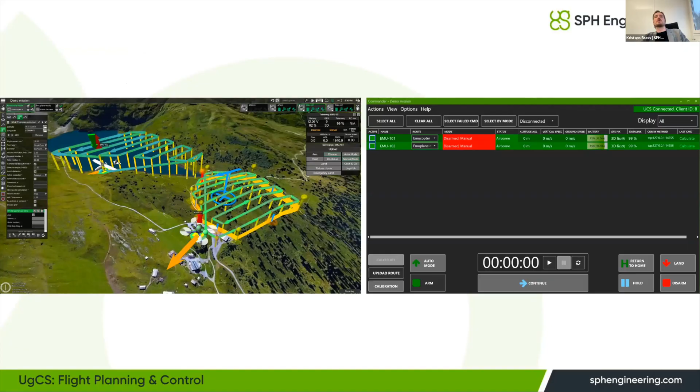Going back just a few slides, what I also wanted to say is that if we take a look at all of the lineup of products that we have, I'd say Commander is basically the most full version of UgCS you can get, because with this you essentially get all of the features of all the other licenses with the addition of flying multiple drones. So if you have some application which requires flying multiple drones at the same time, this would be the solution to use.

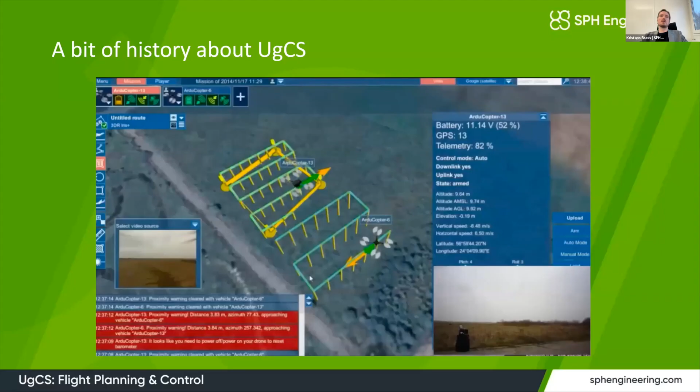I'll look at the Q&A in just a bit, but for now I want to show you the software demo, how UgCS Commander works in reality. This will be in the simplest scenario with only 2 drones, but like I said, it can be extended. So a small disclaimer.

I am currently on a Mac system. Commander works on Windows, so I have Commander running from Parallels on my Mac, and the UgCS running natively on my Mac. Just so you know, I'm running a non-standard deployment for this webinar. The standard deployment would be running UgCS as well as Commander on a Windows native system.

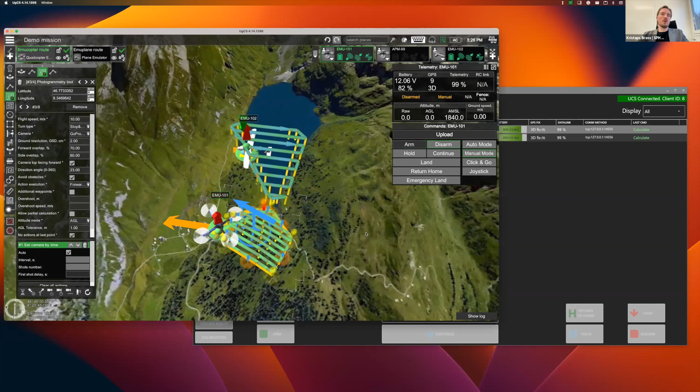So let's go here. I'll share my screen with you. I'll have to share the whole desktop, just so you can see both programs running simultaneously. So here they are. Many of you are probably already familiar with UgCS. I have it running here, and this is just the basic setup where we have two drones.

I have the Emucopter, and then I have the Emuplane as well. So basically one quadcopter, one fixed wing drone. If you have any other drones, you would also have them available in Commander. There is a bit of configuration you need to do to define which drones exactly you want to use in Commander, but it's really easy to do. Currently there's two drones which I would be using here.

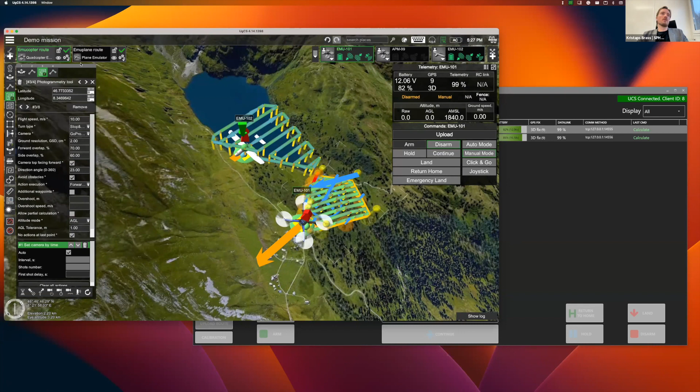Also, I am currently in my demo mission. Commander detects which routes are supported for which drone. So you can currently see that I have two routes, one for each of these drones.

If we now move quickly into the Commander, here, I hope the interface is large enough for you. Like I said, I'm running parallels, so there might be some issues. I hope that everything will work okay, because the Commander is currently running in a virtual machine on the Mac. In case we run into any issues, just so you are aware of what could potentially happen here.

In any case, you can see here I have both of these drones, the EMU 101 and EMU 102. I have routes selected for both. Typically you would go ahead and select them.

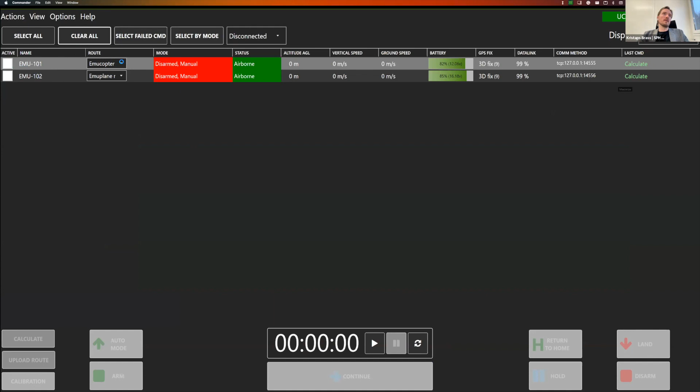Is it possible to connect multiple videos to UgCS Enterprise? Yes, that's entirely possible. UgCS Enterprise supports multiple video streams. In theory, depending on the network bandwidth, it's even possible to have basically up to the number of drones you can fly. In that case, it would be 10 drones simultaneously, so you can have 10 simultaneous video streams.

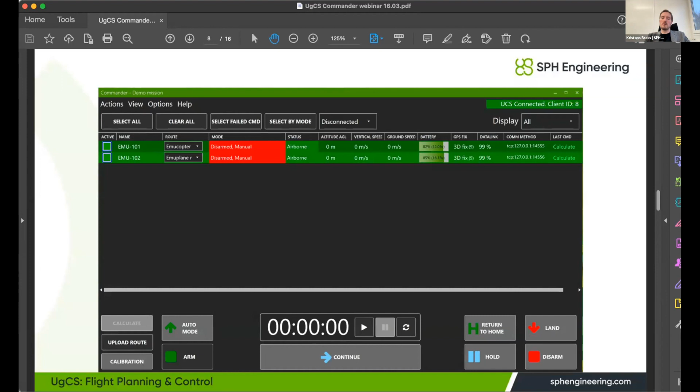One note though is that the video player of UgCS Enterprise, maybe I'll put it here on the screen so you can see it. You can basically divide the window by either seeing 1, 2, or 4 videos simultaneously. If you need to see more than 4 videos at the same time, you would need to open up another instance of the video player, and then you can have additional video streams. So essentially you're not limited in that sense. I'd say the main limitation is actually the network bandwidth.

So now my Windows is starting up. I knew I should have done this on my Windows machine back at home, but hopefully we'll get there and I'll be able to show everything. Okay, while it's starting, I'll see what other questions I can answer here.

From Mark, there's a question of what equipment is needed. In general, I'd say equipment needs are, first, obviously whichever drones you would be using. That's number one. Second, assuming you're using DJI drones, multiple at the same time, I would recommend using a dedicated Wi-Fi router, a good one that can handle the simultaneous connections, and then basically a computer, ideally with multiple screens, although you can actually use also multiple computers.

For example, if you know that in the field you're going to have, let's say, 2 laptops, that's also not a problem. Like I said, the software is modular, so you can have the software running on different computers as long as they are on the same network. You can have a setup like this: UgCS on one device, Commander on the second one, and then the videos that you are getting from the drones on the third device.

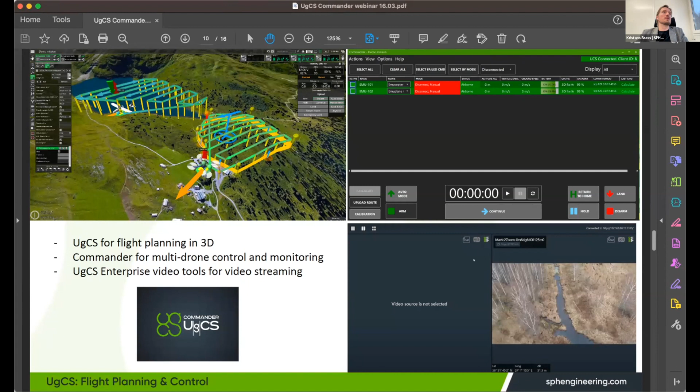So I'll just now switch the presentation back into full screen mode. I will reshare the screen just to make sure everything is running smoothly here, and then I think let's just basically go through the Q&A. If somehow miraculously the virtual machine does decide to launch, then I can show you that. But if not, then I think we can handle it, and that's okay.

Another question I see is, any services related to agriculture or precision farming? Well, agriculture might be one of the applications for Commander as well, especially if you have multiple drones which you intend to use at the same time. With UgCS Commander, you can have, for example, a different drone flying over a different agricultural field.

You can track the drones, track their speed, see the live video coming from them, as well as their altitude, for instance. So for sure, I think agriculture can be one of the potential applications where Commander can significantly speed up the time it takes to do surveys, as long as it's possible for you to run multiple drones at the same time. This is also one of the real areas where this can be deployed. Okay, let me just quickly read the next question that's here.

Okay, this is about different flight plans. Can you upload multiple missions and have Commander give different flight plans to different drones?

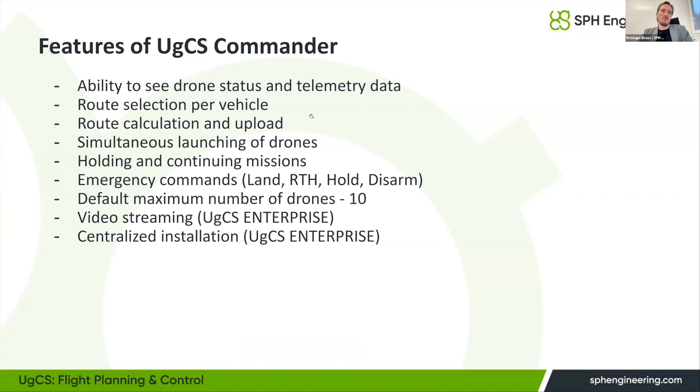You can already actually do a similar thing with our corridor scans. You can plan a longer corridor scan, and split it, and then with the split routes, let's say you're running 3 M300s, you can simply select which route would go for which drone.

I do have an idea how I can try to get the virtual machine working. So let me try this.

So then kind of going on further, what are the questions I can answer here? Well, quite a lot of them actually, really good.

Is data that has been captured protected, and how does it happen? This is a question from Anonymous. Well, basically all the data you gather, it really depends on whether you are streaming the video or not. The first scenario would be when you are not streaming the video with UgCS Enterprise or Commander. In that case, all the data is stored locally on the SD cards of the drones, as you would normally map out an area, so everything would be stored on the SD card of each of the drones which are flying.

No, it seems that Parallels is refusing to start. I think at this point what I can do is share the screen of UgCS, and then I can try to show different things there.

For the next Commander webinar, I promised you guys I will be using a Windows machine for that, without any virtual machines. It seems that maybe when I'm sharing the screen over Zoom, that's what it doesn't really like. But in any case, I'll share my screen of UgCS.

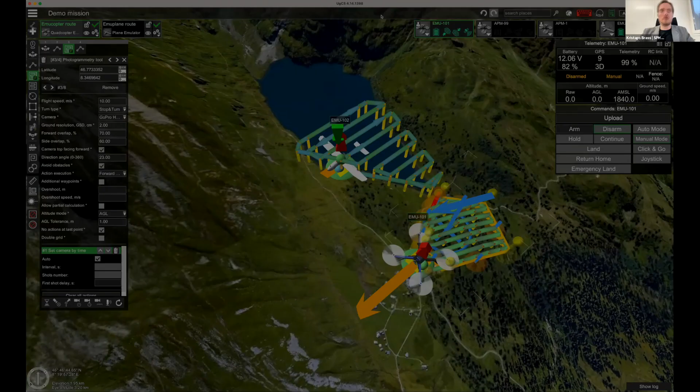So maybe quickly also address the question again about how you plan for multiple drones. I would probably actually do it like this: you can create a new mission, and then let's say we create a single route for the DJI M300.

We can go into corridor mapping, select some camera. Let's maybe use the H20 ground resolution, and specify 2 centimeters. Now we can plan, for example, a corridor scan mission. So maybe something like that.

Okay, so now we have 2 of these survey lines. In any case, we only have 1 corridor scan mission right now. So what you can do is, in the corridor scan, click on any of these points, and then at this point you can select the option to split.

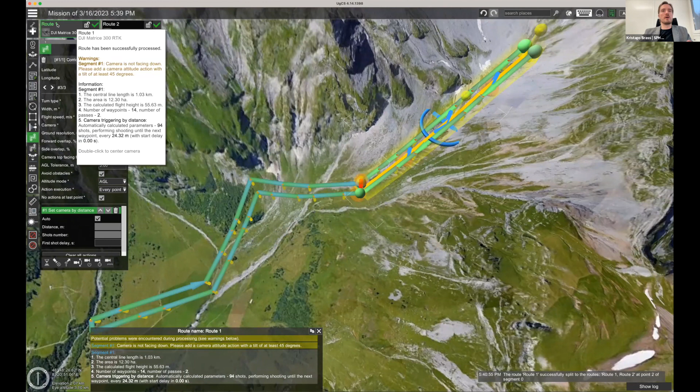So you select it, and now you can see you actually have 2 separate routes, so 2 separate corridor scans. In this case, you can run a different drone on each of them. In Commander, you will be able to choose, let's say, route 1 for the first M300 and route 2 for the second one. So that would be one option of what you can do.

Going back to the questions we had, from Matthias: is it possible to operate the drones in manual mode and see the real-time location of the drone in UgCS? Yes, it's fully possible. Here we can go to the emulator drone, and even with these simple emulator drones, you can fly them in manual mode. UgCS will show the drone no matter what, as long as it's connected there - this includes ArduPilot, PX4, DJI, no matter what drone you have, as long as it can connect directly to UgCS.

You can see here it shows the flight mode, so even when you're flying the drones manually, you will still be able to see them. You can imagine a case where you have 5 or 10 drones flying simultaneously, where you can monitor their location on the map here in UgCS, and see all their telemetry data in UgCS Commander. It doesn't matter whether you're flying them in automated or manual mode, you will be able to see all the drones and their locations. I hope that answers your question.

From Stefan, next question: does Commander provide an exact time for synchronous operation of 2 or more drones in order to reach defined waypoints at a certain time? Good question, but the answer is that it does not synchronize the drones by time - that's something we have in our drone show software. So if you need time synchronization, which is typically used when you want to use drones for entertainment purposes, I'd suggest looking into our drone show software.

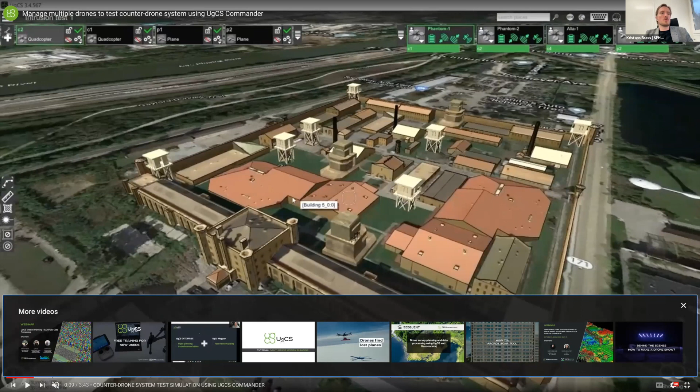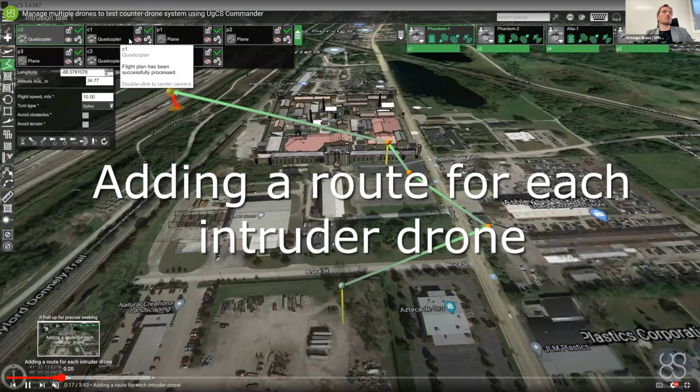Here you can see an example of how this would work. Here's a 3D model of a building imported in this case - looks to be a prison facility. Here you can see there are multiple drones connected at the same time, and they'll be shown soon as well. This is testing counter drone systems, so you can see there are different routes planned, one for each drone, and the facility will be facing an attack from drones from different directions.

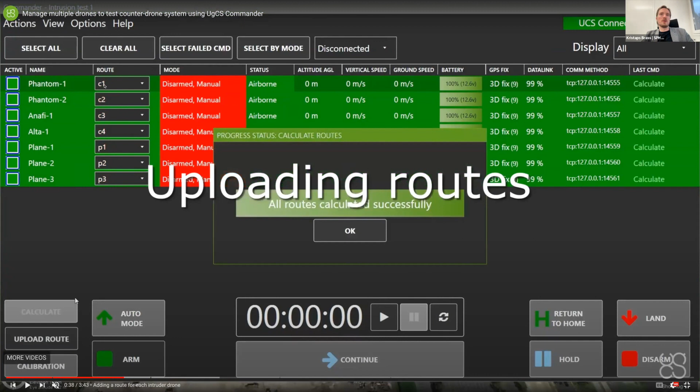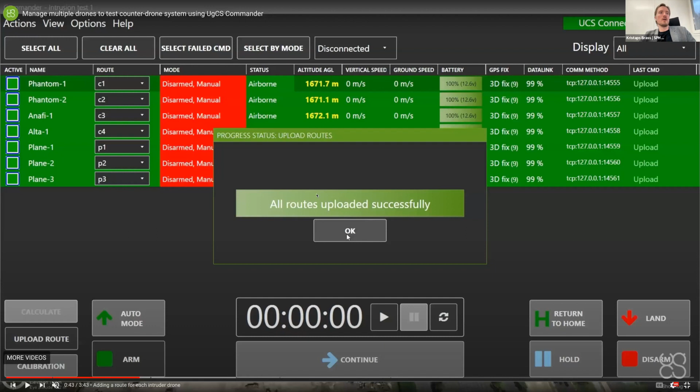Step number one is you need to select all the drones, and then we're pressing on calculate - this calculates all the routes. Then the route colors change from red to white, and now we have a message that all routes have been calculated successfully. After that, next step is you upload the routes - now all routes are uploaded to all drones, which makes things a lot easier, because imagine having to click on the drones one by one and do this one by one - you'd go mad doing that. This basically automates everything: single button upload, single button launch.

So now you can see we are seeing all of the drones here on the map. And so then the next step is we can execute ARM on all of them. And then we can select auto mode to have the drones take off.

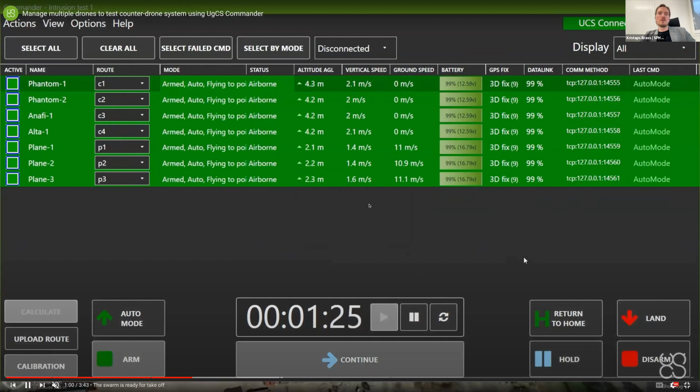At that point, we can also see, you can initiate the timer, so we can see how much time the drones have already spent in the air. You can see the drones are taking different trajectories.

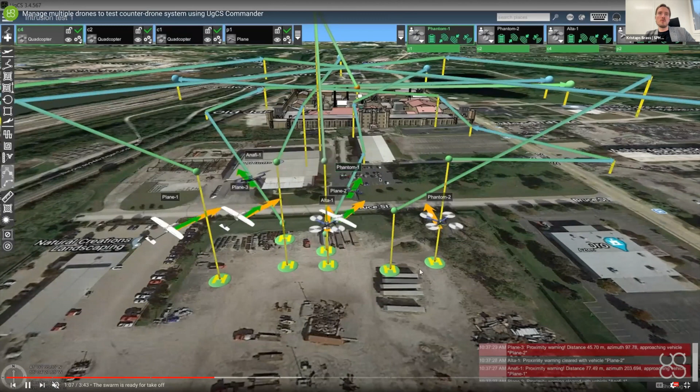You can also see that we are getting proximity warnings from different drones. So yeah, it also answers the question of, when two drones get too close, how do you know that? You know that from those proximity warnings.

So now you can see that basically all of them are going towards their intended trajectories, and then they would basically try to invade the airspace of this facility. As you know, over most prison areas there is a no-fly zone, and I suspect many of these areas also already have some counter-drone systems in place. So yeah, this can basically test how these systems work in these cases.

But again, like I mentioned previously, the Commander is not just for this, it can also be used in other applications, basically any operation where you need to use multiple drones at the same time.

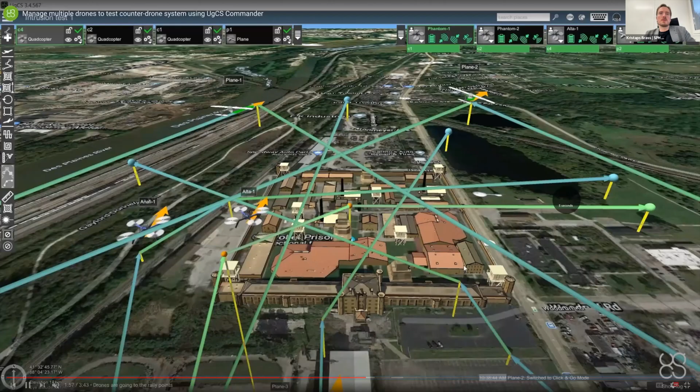So let's skip ahead just a bit. So yeah, now at this point, when the drones are stopping at a certain point, you can also make it so that from the click of a button, when you press continue, the drones will continue from the point where there was the wait action.

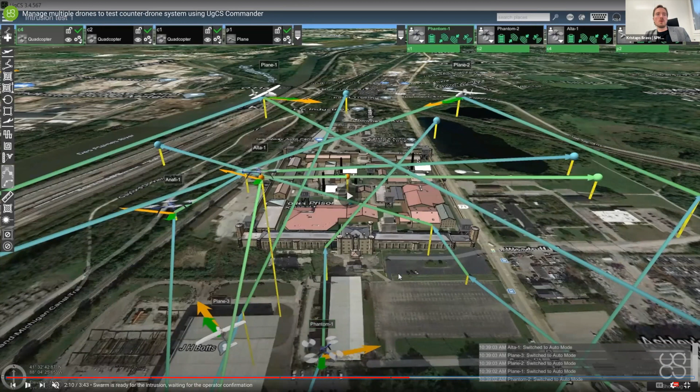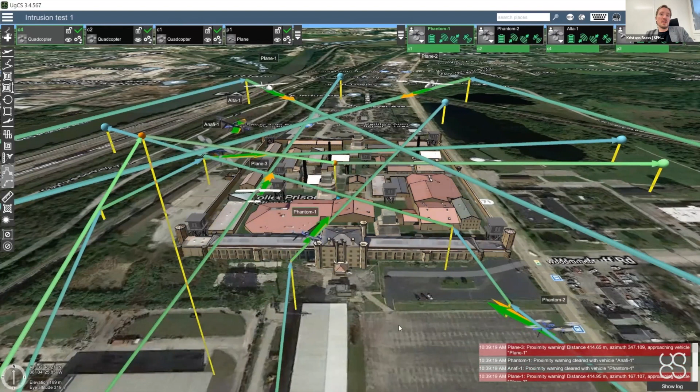And so now you can see there's multiple drones trying to invade this area from different directions, to basically see how the counter-drone systems react. Will they detect all of these drones, or will some drone be able to pass undetected?

There are also, of course, now systems that already can bring the drones down to the ground. So yeah, it can be used for testing such systems and their effectiveness. So yep, I believe that answers that question.

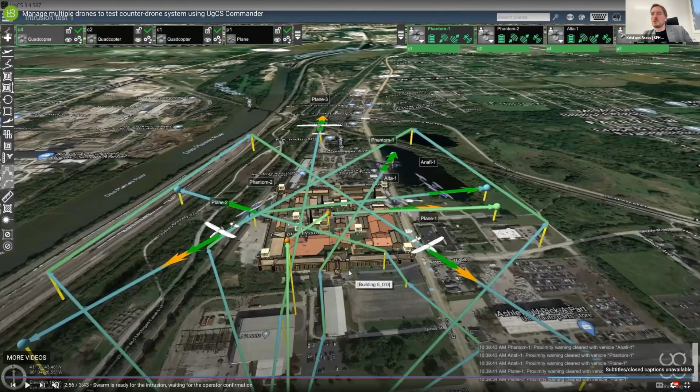So also, if you want, for example, drones flying side by side, then yeah, you would simply construct the route in such a way. I'll then try to go a bit further through the questions that you guys have at the same time, and maybe share the presentation again. Okay, so now let's see what other questions there are.

Okay, so is it possible to program an interaction between several drones? Let's say when the second drone is programmed to continue the mission when the battery of the first drone depletes. This is actually a really good idea. We don't have it yet, but overall the possibilities are there. It's something which, in fact, you can also add on top.

As you know, for UgCS we also have an SDK available, so if you have some programming skills, you can actually add some functionality on top of this. Or if you're interested in such a project, you can get in touch with us and we can discuss this, because this is something which can be implemented, I believe, quite easily. So yeah, we can talk about this. What's the application there? I think this is technically possible and should not be that hard to implement.

Next, has anyone managed to obtain the waiver for using multiple drones? We have experience from our drone show business helping customers obtain FAA permissions in various countries, in Europe and in the USA, when users need to fly swarm drones. Of course, there are oftentimes different requirements. This can vary - there can be requirements that you need one pilot per drone, and then maybe you won't even need a specific waiver. Or if there's one operator and multiple drones, in those cases you would probably need to obtain a waiver.

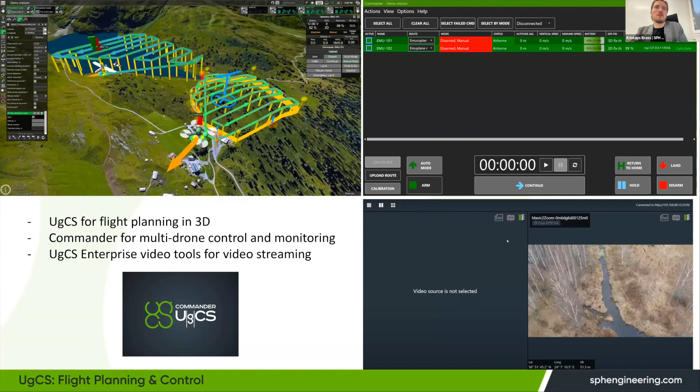Okay, I'll see there's a few other questions here. While I answer them, I don't want to move from here, so I'll just keep this slide open.

It's possible to program some interaction between drones. Yes, overall we can program interaction so that, let's say, when one drone finishes a flight, then the second drone is launched. That is possible, but it's not yet currently in Commander.

We need to understand the overall use case more. If you have development skills or resources, you can also use our SDK, which does allow you to interact with drones. It allows you to, for example, send auto mode to a certain drone when another drone has reported that it has landed. So you can actually develop such a system.

If you require, we can also develop it for you. We are open to different custom integration projects. From the start of SPH we've kind of had this mantra: the crazier the project, the more interesting it is, oftentimes.

Then there's another question: does the system need an internet connection to operate? Good question again, answer is no, internet connection is not needed. UgCS is overall, even historically, built around the fact that you don't need internet in order to operate it. I will quickly share the screen of UgCS with you, just to show you what I mean by that and how you can use this when you don't have internet.